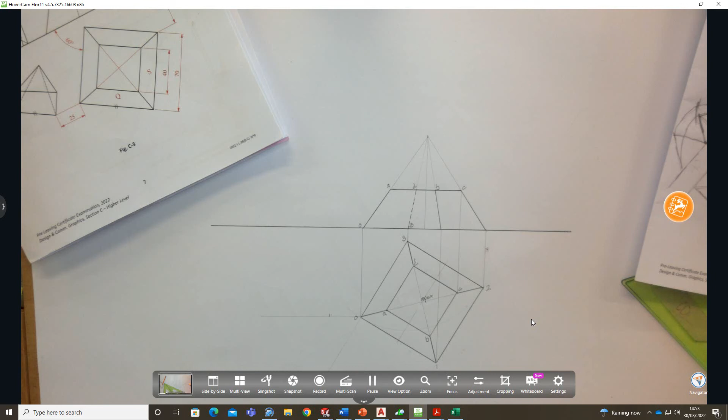Welcome to this 2022 question C3, the mock exam.

So I think starting it off is fairly simple, right? So 60 degrees, down 45, this line is at 30 degrees, 70 long. Then to get the square inside, step 20 left and right of the centre line, draw parallel to the edges. Now, if you want to get C, go up vertically from C until it hits the edge apex to 2.

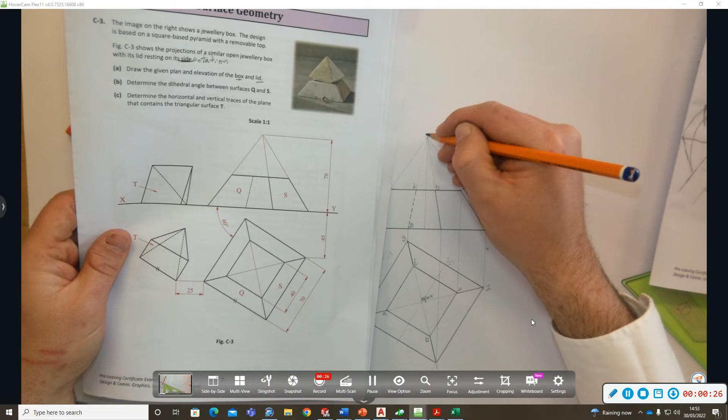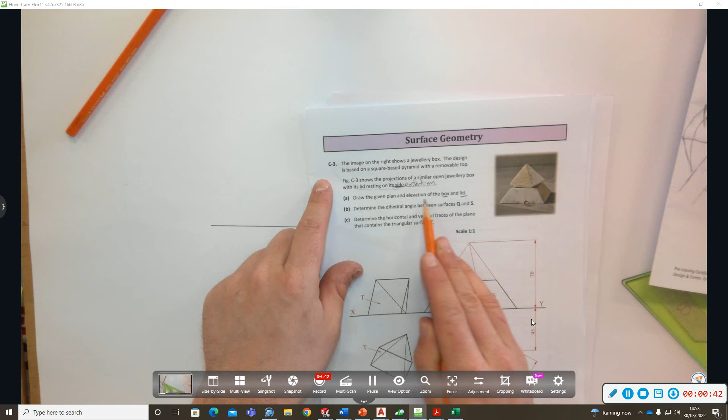Now, if you're reading the question, it says we've got the design based on a square-based pyramid with a removable top, shows the projection of a similar open jewellery box with its lid resting on its side. With a rotation. Part A, draw the given plan elevation of the box and lid. So you draw the box first and then the lid.

Right, so what we're going to do is a rotation. We're going to look along this line here, parallel to the base. That's on the XY line in elevation. So it's a true length in plan, and this is parallel to the XY line in elevation, so it's a true length. So they're both the same dimension. So the lid is placed flat and then rotated into position.

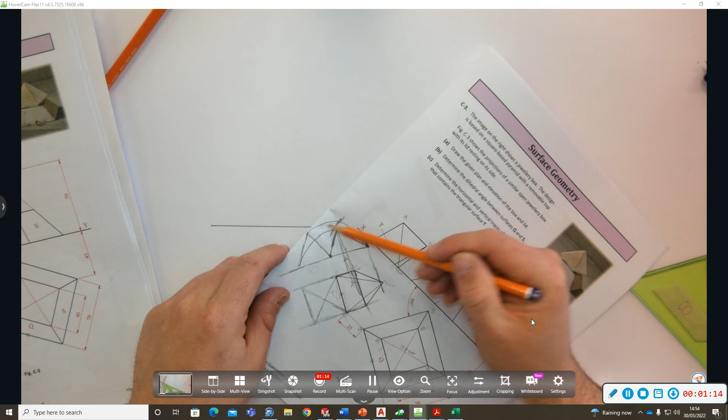So we'll take an auxiliary, put our compass here, and rotate them down. And then we're going to project back to our plan and perpendicular to our hinge line, till they intersect, and then we'll find the dihedral angle. Okay, so I'm going to set one up here. So 40 long.

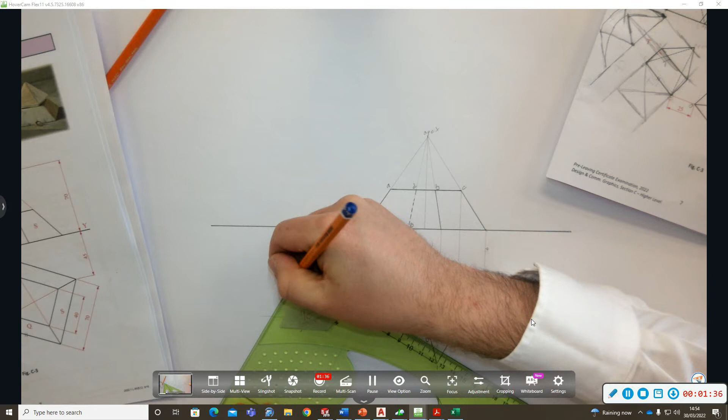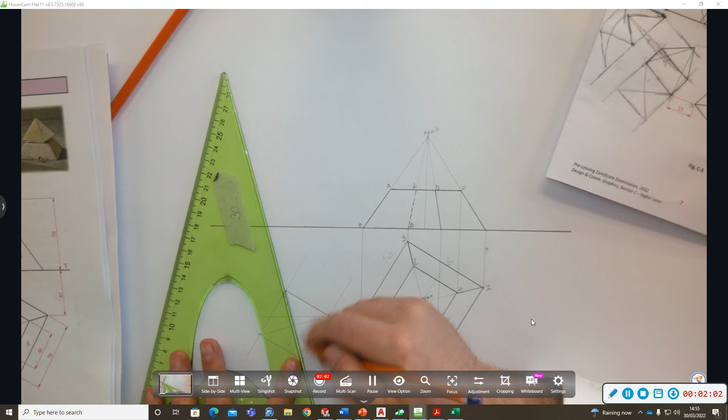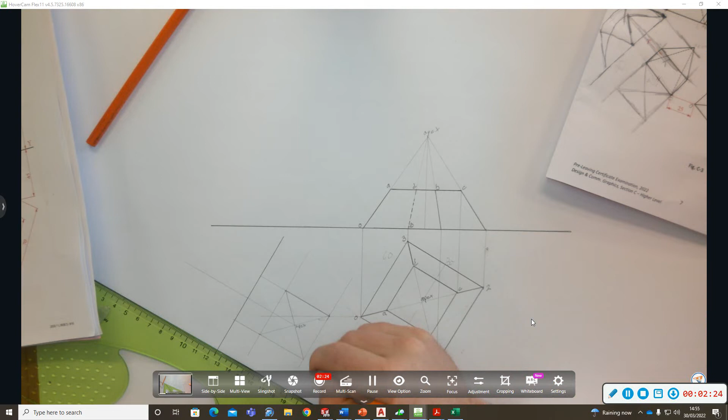I'm going to do this light. Apex. Now we're going to draw in an X1, Y1 line. So we're going to project these points up. Now I'm going to call that B, A, C, D. Take the height from here, same height. Put it there.

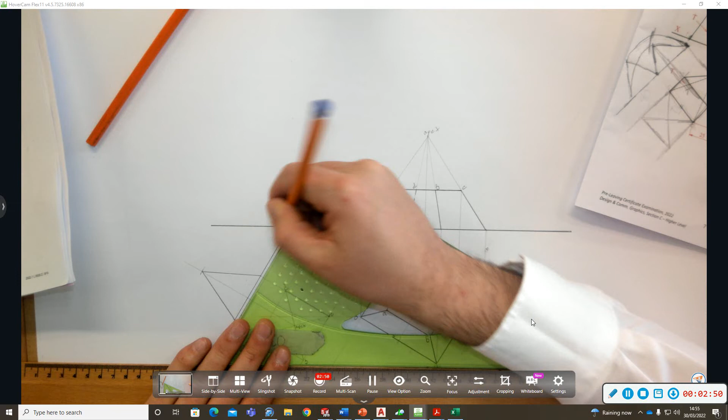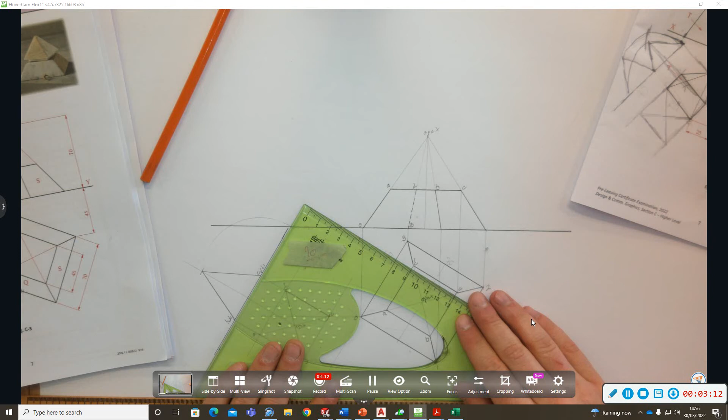Now, that's C1/D1, B1/A1. We're going to take our compass, rotate our apex down onto the X1, Y1 line. And then I'm just going to extend that, and we're going to project back down.

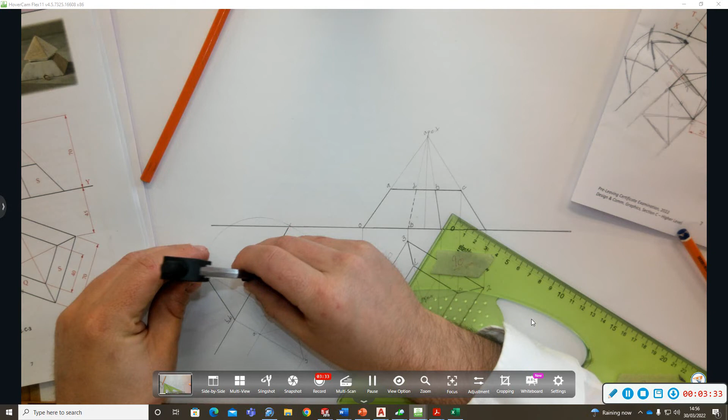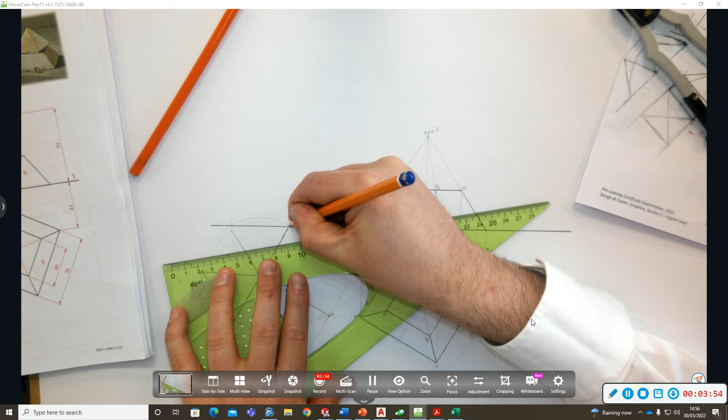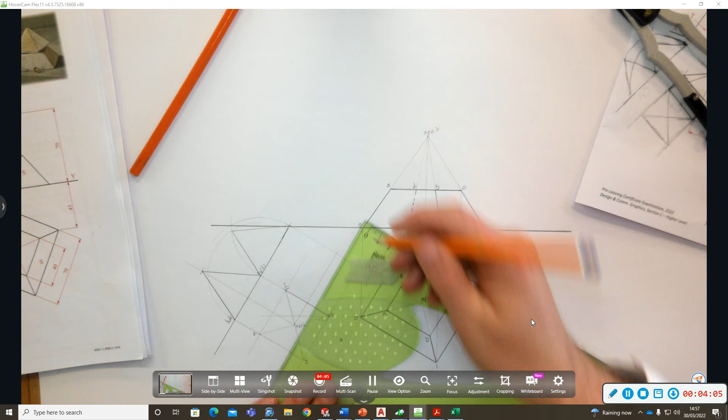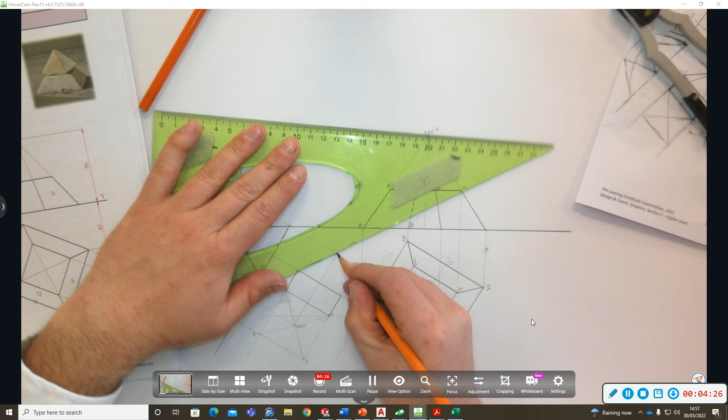And then I took that distance, rotate it down. Then I'm going to swing from here and put my compass there, rotate A to B, where they intersect. And then I can bring this back here and bring this down. So heavy detail here. And hidden detail here.

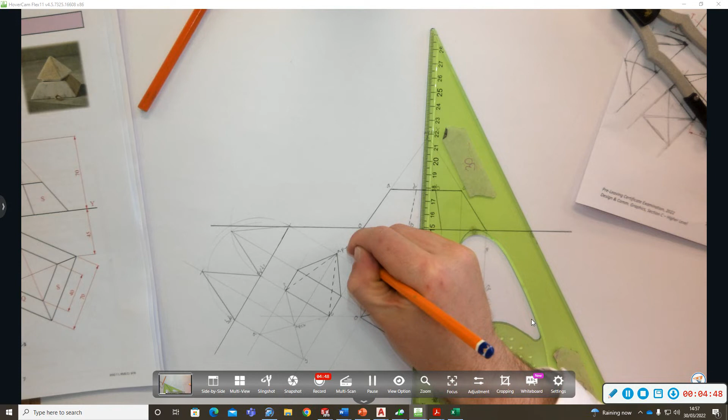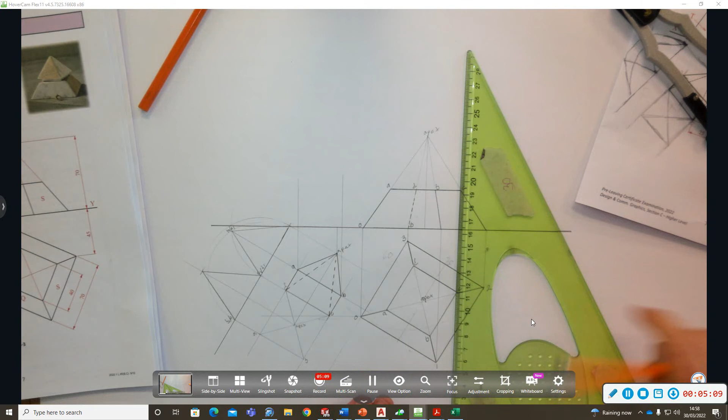And then apex, B1A1, B, A. Now I'm going to project to elevation, the height there. B and A, I'm going to project the height up. The height can be taken from our auxiliary elevation. So take the height from here, step it there, and it's not in line with the cut surface in elevation. That might be a common mistake students make.

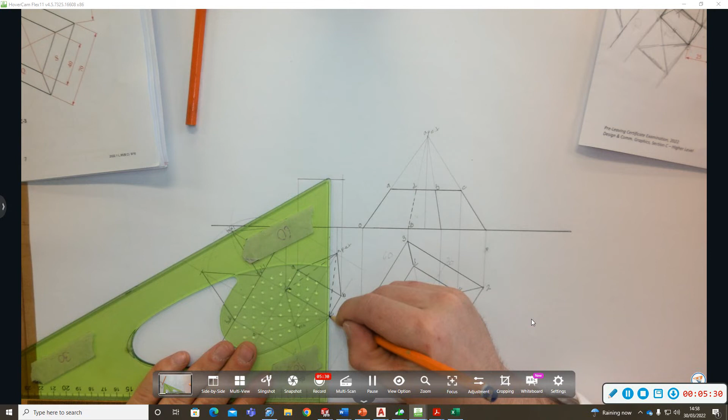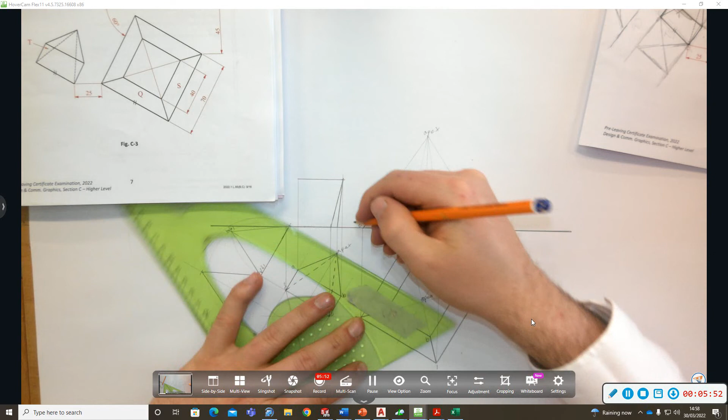Project up, D and C. Sort of heavy that in. Hidden detail here.

Close that door. Close the door. Yes, thank you.

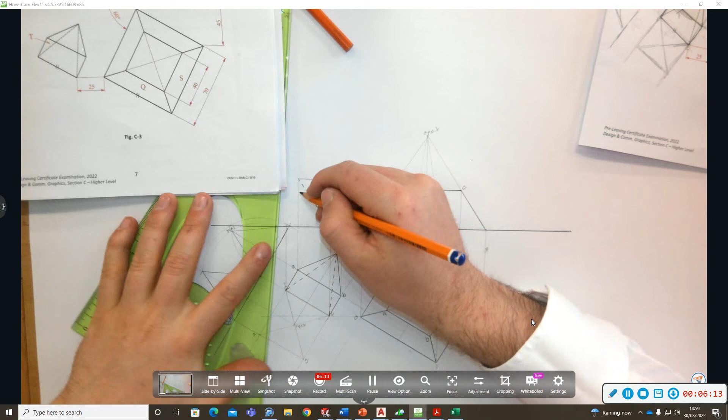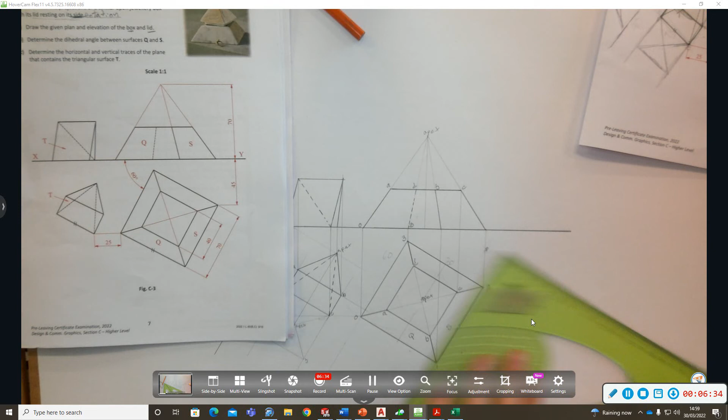Good. Now, here we've that done. Now we just have to find the dihedral angle between Q and S. So I could do that using a rabatment or the auxiliary. I'll be using the auxiliary, that's the way I prefer to do them.

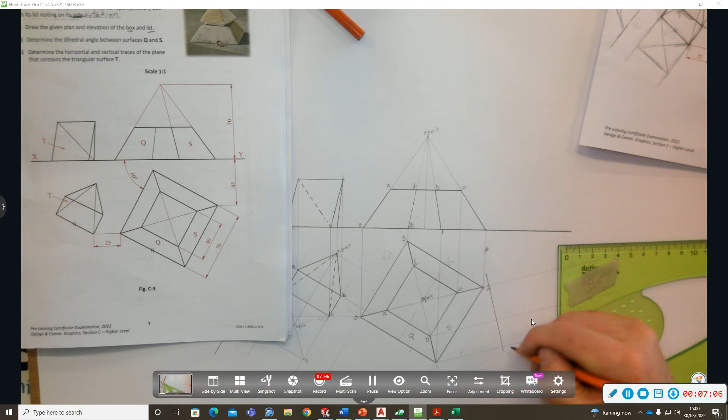So going to check, is line B to 1 a true length in elevation or plan? No, because it's not parallel to the XY line in either view. So I'm projecting perpendicular to the line of intersection. I'm going to draw in the X1, Y1 line. Now I'm going to take the heights from elevation. So all of them are the same. So I just take the height of C there.

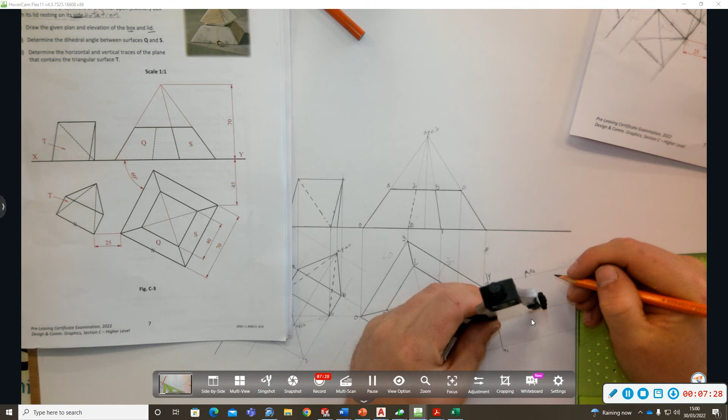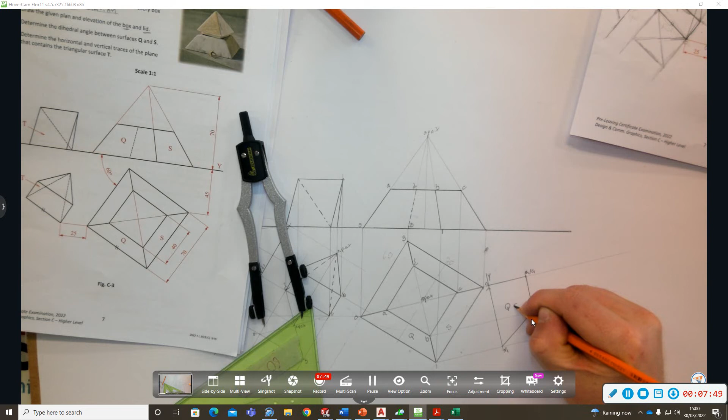So C. That's O. C1, A1. It's the height of B there. B1. And there's the height of 1, on the XY line. So now the line of intersection is the true length. Now Q, and then surface S is hidden behind Q. Now this is the line of intersection, so that needs to project as a point. So I'm going to look along that line of intersection.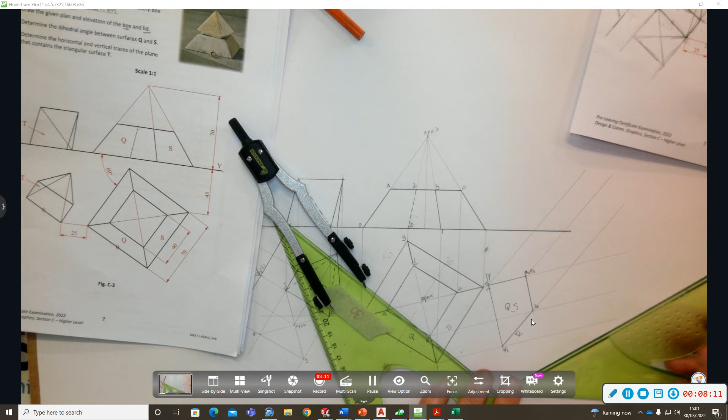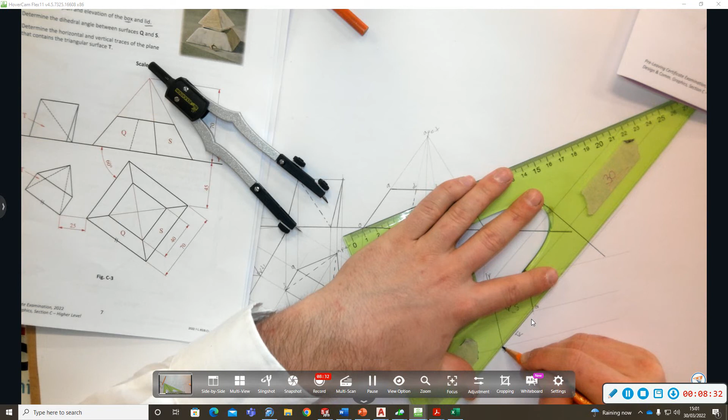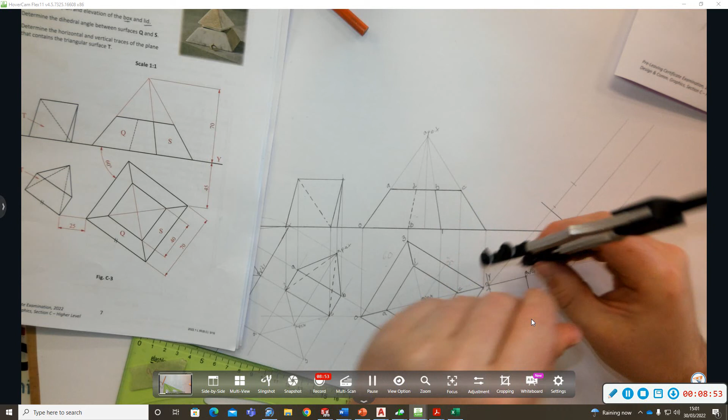So I'm going to draw in my X2, Y2 line. Now, take the distances from the X1, Y1 line back to plan, so 2. Mark 2 in. C. A. Oh, sorry, what was I doing projecting C from there? That's on the wrong point. So go back to 0 there.

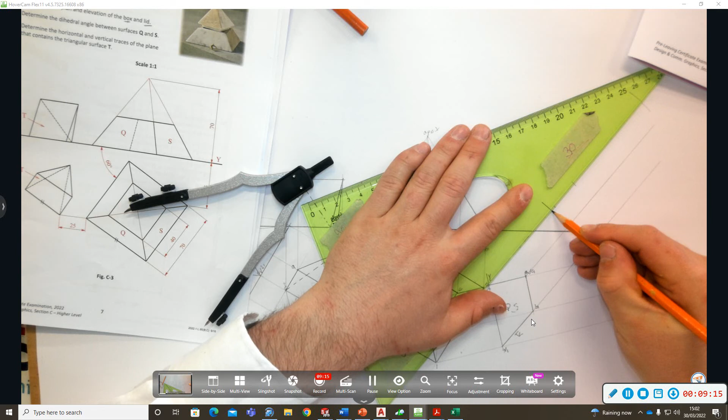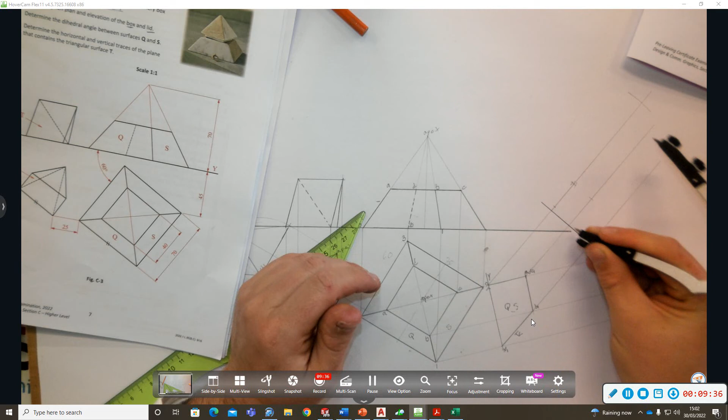So we need that. C and A are on this projection line. And then A. There's B. Now there's 1/B2. Okay, C2, A2, 0, 2, and we can join them together. Tiny bit off there.

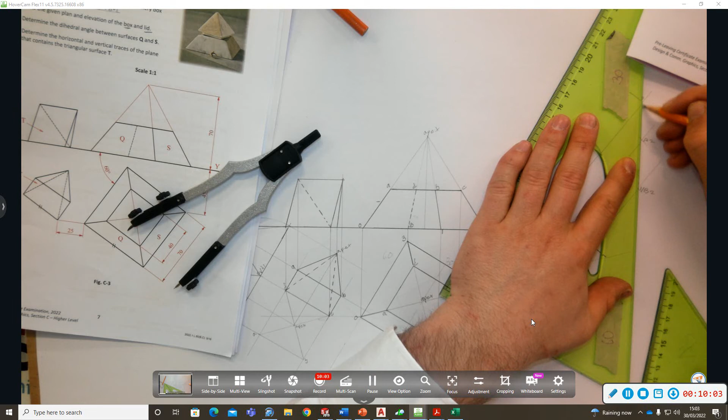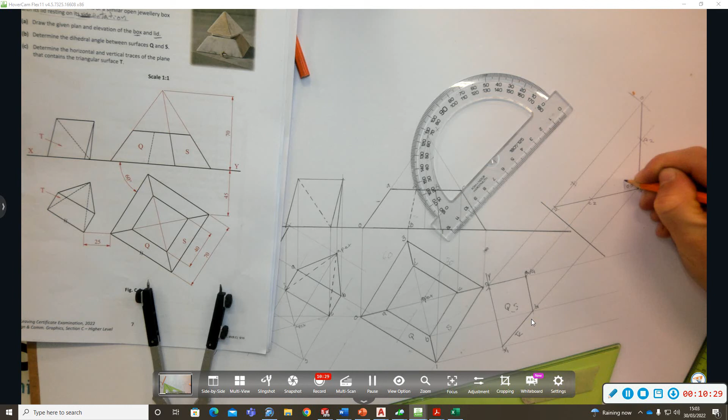Now we're going to get a protractor and measure the dihedral angle, and it's going to have an angle of 100 degrees. So there we go, 100 degrees dihedral. Now, last part, triangular surface.

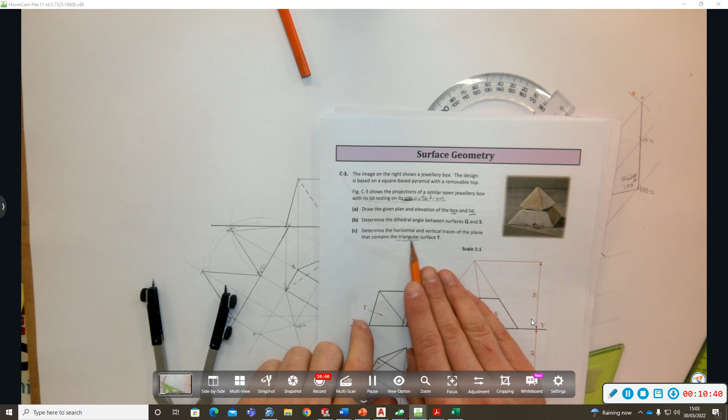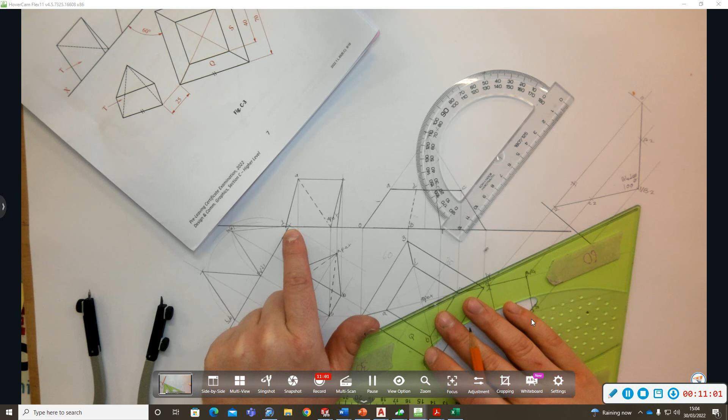Determine the horizontal and vertical traces of the plane that contains the triangular surface T. Right, very easy mistake to think it was the base. It's the triangular surface D, A, apex. Now, because line apex to D is on the XY line in elevation, that means it's on the horizontal plane, because the XY line is an edge of the horizontal plane in elevation. So line D to the apex is the HT in plan.

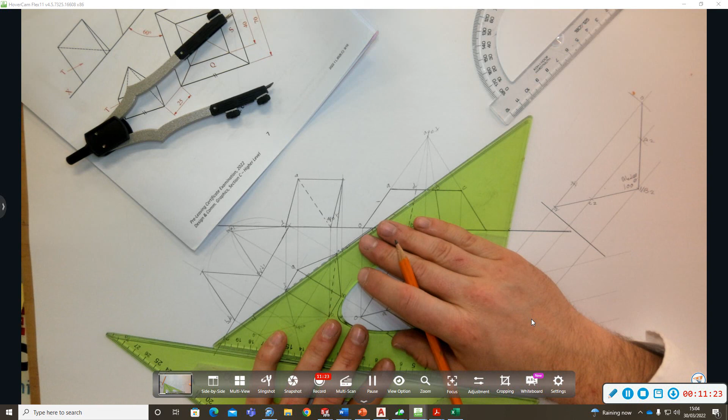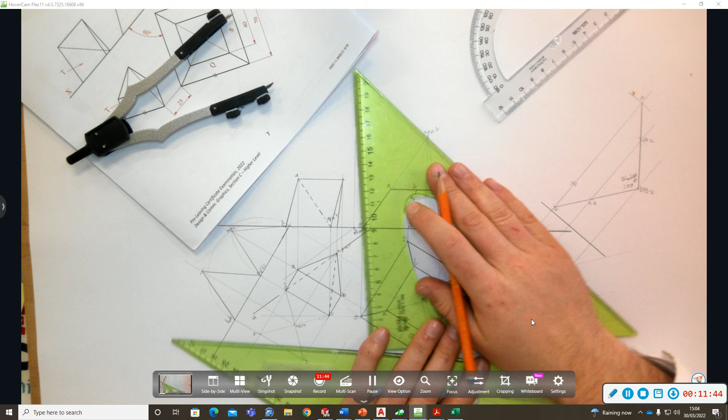So I'm going to project this point up, and parallel lines are parallel in every orthographic view. So we're going to go parallel to the horizontal trace in elevation, which is on the XY line, from letter A, and where they intersect, we're going to join back to T. So there's the vertical trace.